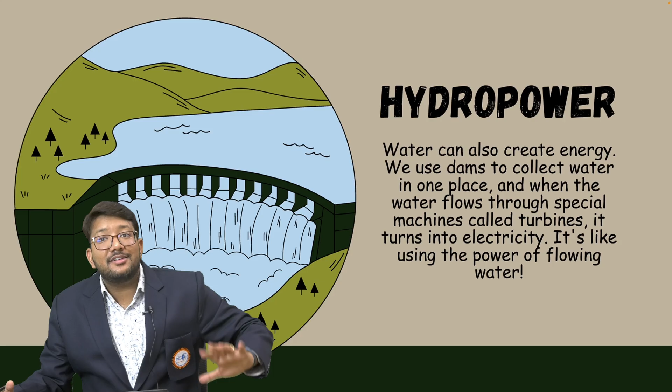As we know, water can also create energy. We use dams to collect water in one place, and when the water flows through special machines called turbines, it turns into electricity. It's like using the power of flowing water. So we can say that hydropower energy is the natural flow of water we are tapping, and with the help of technology we are converting that kinetic energy of water into electricity.

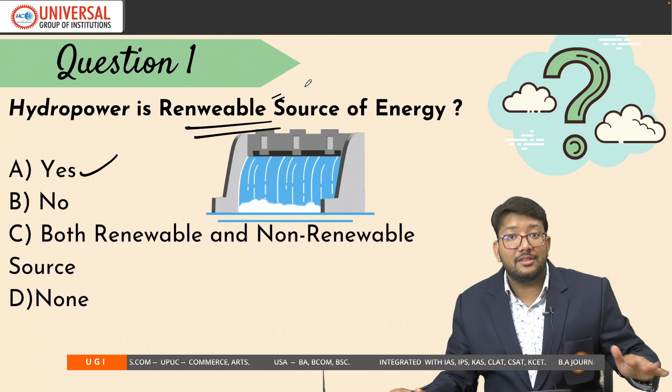If somebody asks you whether hydropower is a renewable source of energy, yes, it is. Renewable source of energy means it can be renewed again. A general misconception is that renewable source means zero carbon dioxide emission. No, it's not that. If carbon dioxide emission were the definition of renewable source of energy, then biomass wouldn't be coming under renewable source, because in biomass energy carbon dioxide gets released. So I want to clear this misconception: renewable source means the source is readily available to renew. For example, water is available, solar is available, wind is available, biomass plants are available, and geothermal, the earth's energy beneath the earth's crust, is available. So all these will be called renewable sources of energy. Non-renewable means fossil fuels, coal, petrol, nuclear, all come under non-renewable, because these are not readily available. They need a lot of time, billions of years, to create.

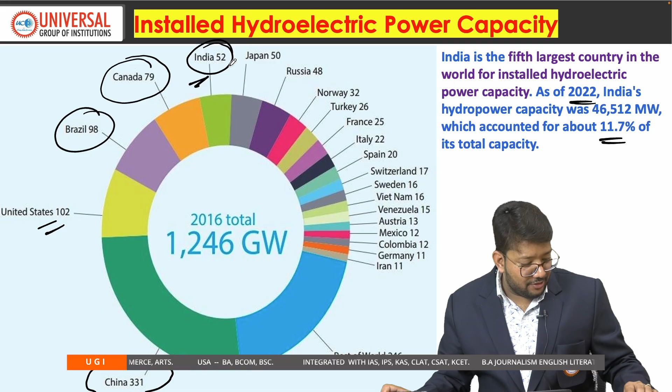Now let's talk about the reservoir. This particular artificial water storage is called a reservoir. Reservoirs can be natural also and artificial also. It was asked in an examination whether a reservoir is always artificial - no, it can be natural also, storing water for uses in homes, business, and other places. Reservoirs are usually formed by constructing dams across rivers. They can also be formed from natural lakes where the outlet has been dammed to control the water level. This word reservoir comes from the French word meaning storage, and it was first used in 1690. Now let's talk about the types of reservoir.

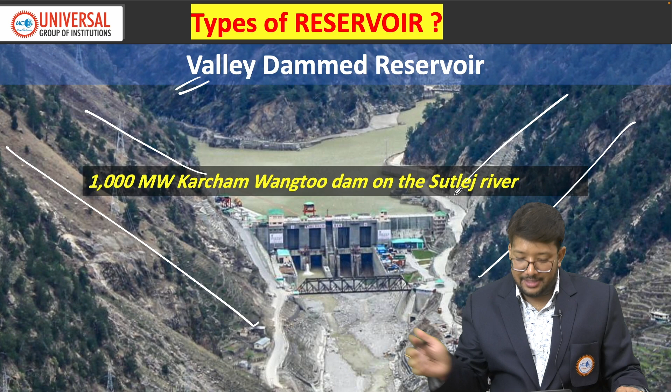First is the valley dammed reservoir. Valley dam, what is a valley? Valley is the area, the place between two mountains. As you can see, this is the mountain, and this particular area is called valley. So if a river is flowing in a valley, and we block that river by constructing a dam, that is called a valley dam, and the reservoir is called a valley dammed reservoir.

There is an example of a valley dammed reservoir in India also: the Karcham Wangtoo Dam on the Sutlej river, producing 1,000 megawatts of electricity. The second type of reservoir is the Bankside Reservoir.

An example of a bankside reservoir is the Thames Flood Defence Scheme in London. This particular reservoir does not have any capacity to store water, so it is on par with barrages.

What is the difference between barrages and dams? Dams have many uses - we can use dams for tourism, irrigation, agriculture, everything. But barrages have only two roles: first, to regulate the flow of water, and second, to change the direction of the river. That's the only use of a barrage.

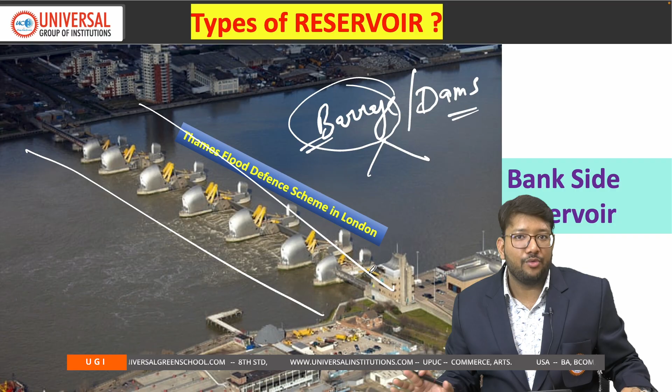One famous barrage is Harike barrage in Punjab, and its water is diverted to the Indira Gandhi Canal. The canal was earlier called Rajasthan Canal, and when Indira Gandhi ji was assassinated, in her honor we changed the name to Indira Gandhi Canal. Now, because of that canal, a lot of the western part of Rajasthan is getting water for irrigation as well as for drinking purposes. The project is still going on, and it is one of the most successful projects in India.

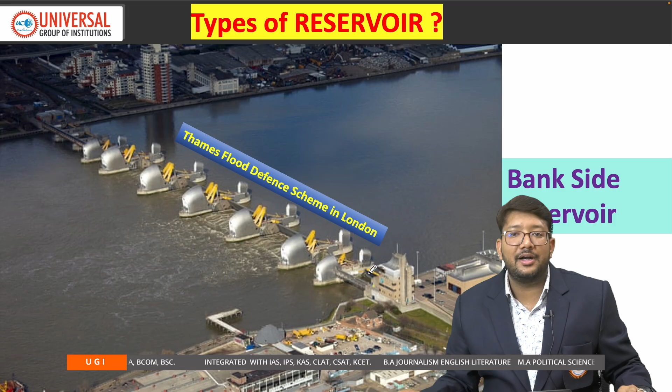Harike barrage has already been asked in examinations. This photo is of the Thames flood defense system, located on the Thames River in London.

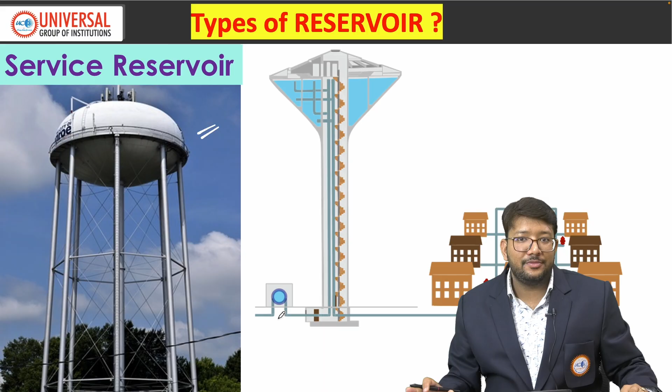The third type of reservoir is the service reservoir. You have all seen these tanks in your neighborhood. These reservoirs serve us for irrigation, drinking, household activities, and industries. So these are the types of reservoirs. I hope you got the point.

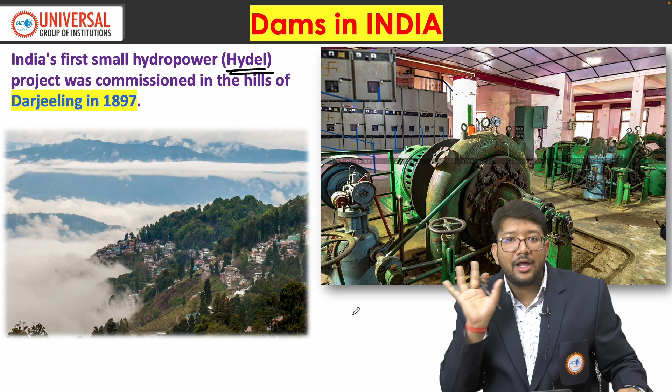In India, the first small hydropower project was commissioned in the hills of Darjeeling, West Bengal, in 1897. Remember, the difference between hydel and hydropower project is simple: hydel refers to small hydropower projects, while hydropower or hydroelectric projects are the big ones. That's the only difference.

This small hydropower station is called Sidrapong Hydroelectric Power Station, the oldest power station in India - again, an examination point of view question. More importantly, it was granted cultural heritage site status by the central government of India in 1997, located on the foothills, 12 kilometers from Darjeeling. It was commissioned on 10th November 1897 by Mr. C.C. Stevens, acting Lieutenant Governor of Bengal at that time.

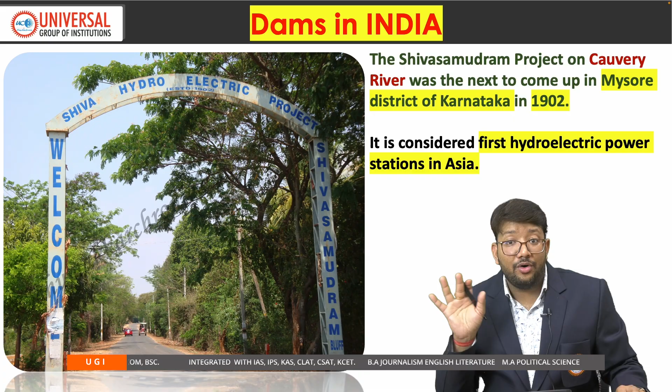The second project that came after Sidrapong was the Shivasamudram project on the Cauvery river. It came up in Mysore district of Karnataka in 1902, and it is considered the first hydroelectric power station in Asia, not even just India. The idea of tapping the water from the falls in this area came to Alain Chartier Joly de Lotbiniere in 1898, who wanted this project to supply power for machinery at Kolar Goldfields.

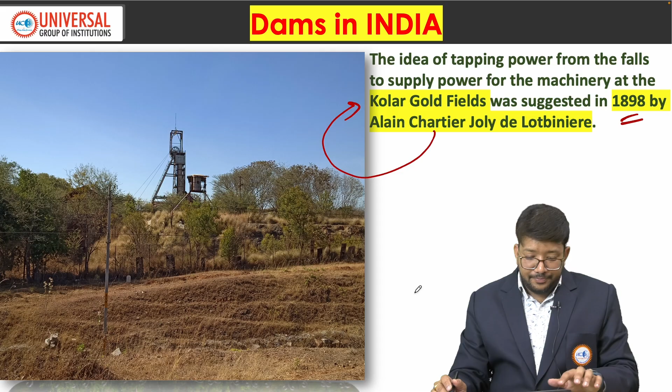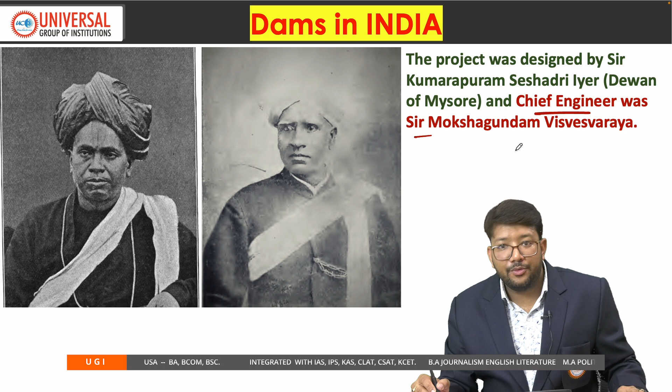Who is the architect of this project? It was designed by Sir Kumarapuram Seshadri Iyer, who was the Dewan of Mysore at that time. Also responsible was the chief engineer, the very famous Sir Mokshagundam Visvesvaraya. These two persons are responsible for the designing and construction. We all know Sir Visvesvaraya - he was knighted KCIE.

KCIE means Knight Commander of the Order of Indian Empire, and he was later awarded India's highest civilian honor, the Bharat Ratna, in 1955. Also, he is celebrated annually on Engineers Day, 15 September, in India.

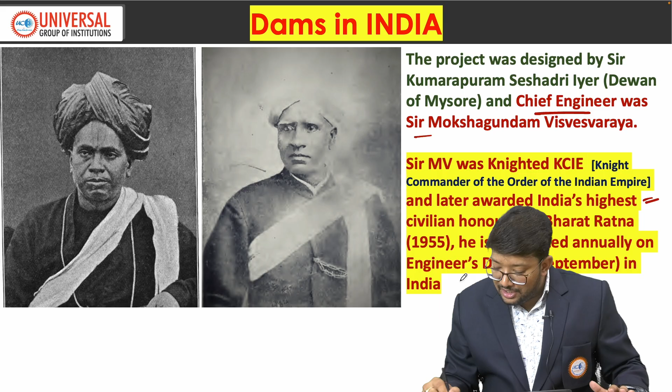Now let's talk about types of hydropower plants. There are 3 types: first is conventional, or we can say reservoir hydropower; second is run-of-river hydropower; third is pumped storage hydropower.

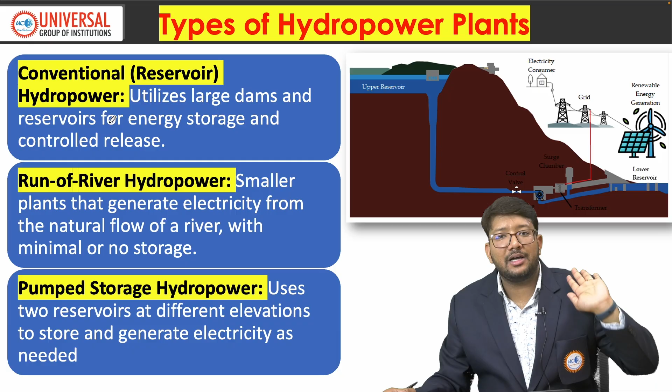Conventional hydropower is simple: we create a dam and then open the gates, so turbines move. That is conventional. Second is run-of-river, which was used earlier but is not that popular now.

These are smaller plants that generate electricity from the natural flow of a river. It is generally used in the Himalayan region, because in that region we cannot have a big reservoir, so we simply use the fast natural flow of the river. So there is minimal, or no storage at all.

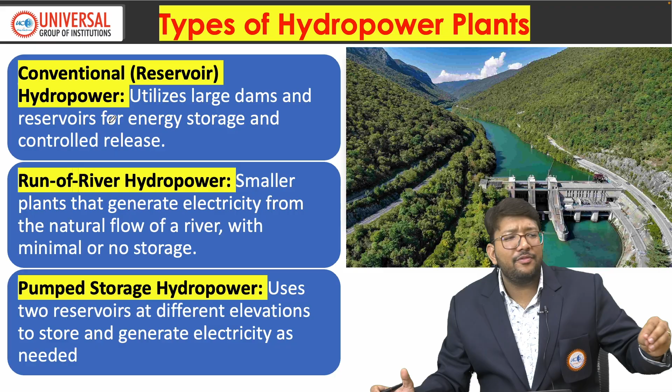The third one is pumped storage hydropower. In this plant, we use 2 reservoirs at different elevations to store and generate electricity as needed. This is the upper reservoir. When the water goes down, turbines move and electricity is generated. Now that water is stored in the lower reservoir.

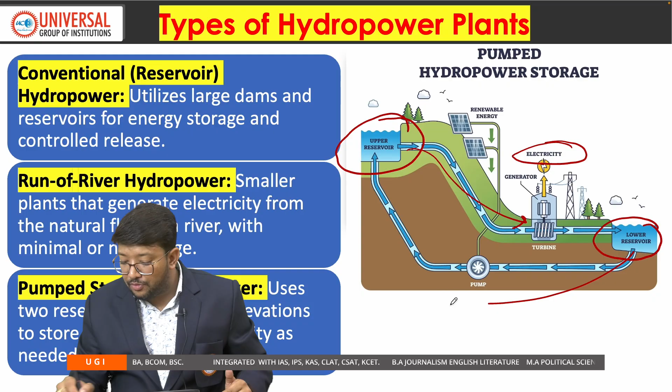Now what do we do? We use the same electricity generated by the upper reservoir's water, or we generally use solar power, to pump that water from the lower reservoir back to the upper reservoir. That is called pumped storage hydropower. That we have to remember.

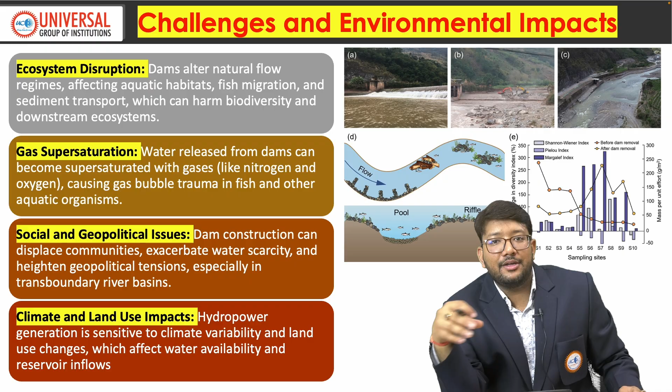Now, what are the challenges and environmental impacts of these big hydroelectric power projects? The first one is ecosystem disruption, because dams alter the natural flow. If they alter the natural flow, it will affect the downstream ecosystem, like fish migration and sediment transportation. Second is gas supersaturation.

We all know saturation, but gas supersaturation means when we release water from the dam, it can become supersaturated with gases like nitrogen, oxygen and methane. It can cause gas bubble trauma in fish and other aquatic organisms. Downstream, fish are simply roaming, but suddenly when this water reaches those aquatic animals, they get a shock, they get trauma - that is called gas supersaturation, because when we open the gate, a lot of gas is immediately released downstream.

The third one is social and geopolitical issues, because when a dam is constructed, it displaces communities, creates water scarcity in the area, and heightens geopolitical tensions.

A recent example is that the world's largest dam is the Three Gorges Dam, built by China. Recently, China has announced plans to construct the biggest dam in the world on the Brahmaputra river. Now that's a problem, because if the natural flow of the Brahmaputra is stopped, Indian downstream areas like Assam and Arunachal Pradesh will be impacted.

Although it's been countered that we don't need that much water, the reality is that Brahmaputra water is needed. The Brahmaputra is also called Yarlung Tsangpo in Tibet. It is called Siang in India when it enters through Arunachal Pradesh. That Siang is accompanied by the Dibang and Lohit rivers, and then it is called Brahmaputra. When it enters Bangladesh, it is called Jamuna.

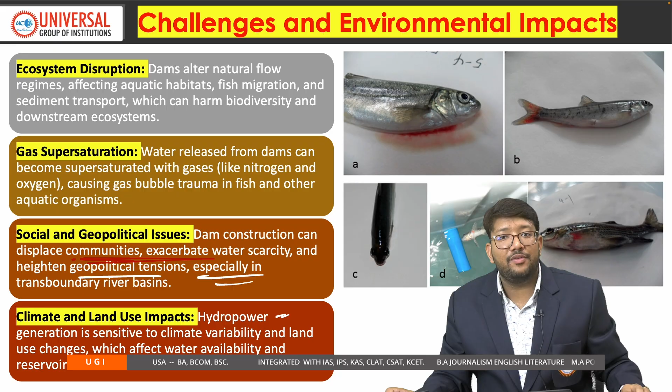When we are submerging a big area of land, fertile land will also go, along with many historical monuments. We may not feel it, but when somebody's home is getting submerged, a lot of memories and emotional attachment are submerging, not only the houses. A bad thing about Indian rehabilitation is that it's not successful, because in the past, when rehabilitation took place, people did not get the compensation as promised, or the standard of living they were expecting. That thing we have to keep in mind.

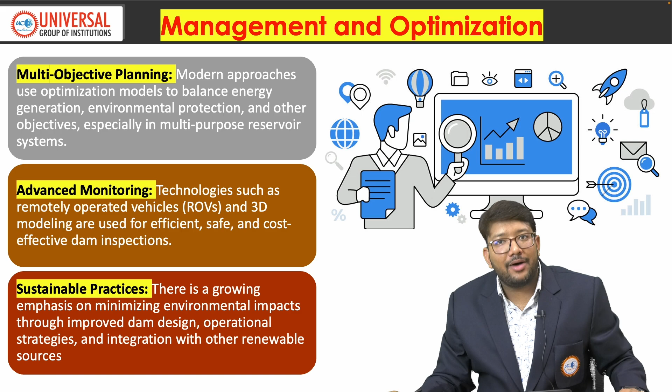Now, what are the solutions? There are three: multi-objective planning, advanced monitoring, and sustainable practices. Focusing on multi-objective planning, the first point is that electricity generation has to be efficient.

Also, we have to ensure water supply for irrigation and drinking, because surprisingly, a dam can create water scarcity, which is like an irony. How can a dam create water scarcity? It should be giving more water to nearby areas, but the issue is that we don't have proper water supply channels for irrigation and drinking purposes. That has to be taken care of.

Third is flood control. The monsoon is going on right now, so whenever the monsoon comes, the rainfall is more and our cities are not able to handle that. Again, the dam gates are opened when they were supposed to be closed to control floods, but it happens the opposite way. Now the dam's water is also coming into the cities along with the rainfall water, so two things hit the cities at once. That is also an issue that has to be taken care of.

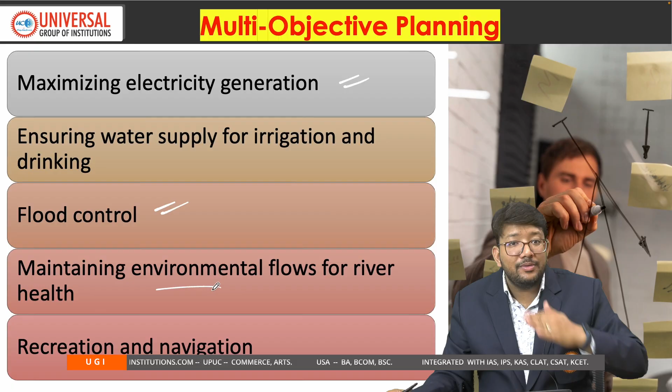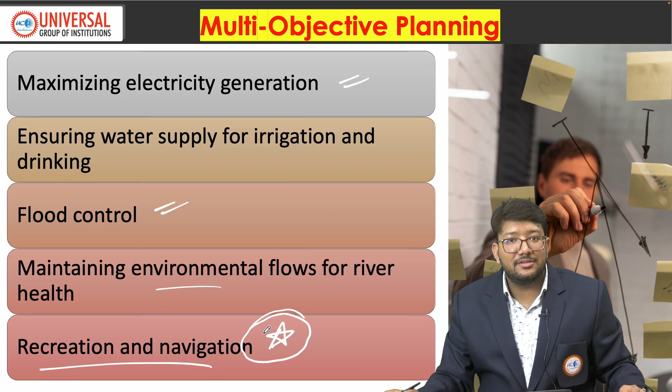Fourth is environmental flows for river health, like river flow has to be maintained regularly. The fifth is recreation and navigation, which helps tourism as well as river health, because when we clean a river, the aquatic life comes back into its lifeline. The same way, the Sabarmati riverfront in Gujarat is a very good stretch, where both things go together - people enjoy leisure activities and the river gets saved. The government is planning the same thing for the Yamuna river in Delhi. Let's see how it goes.

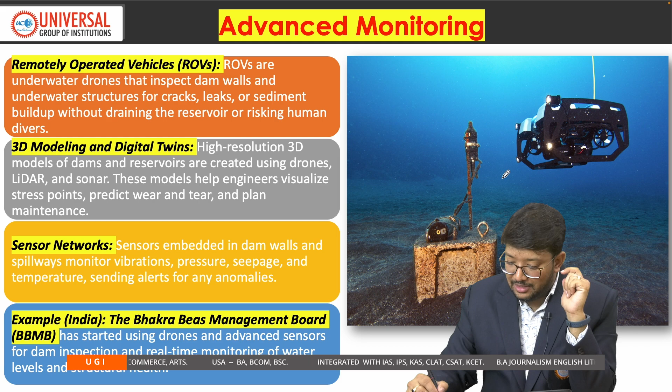Second is advanced monitoring. This is very important - we are using or can use remotely operated vehicles, ROVs, as shown in the diagram. These ROVs are underwater drones used to inspect dam walls and underwater structures for any cracks, leaks, or sediment buildup, without draining the reservoir. Otherwise we would have to drain the reservoir and inspect manually, which takes a lot of time and risks human divers, because many times divers get choked and die at depth due to methane production.

Second is 3D modeling and digital twins. This means high resolution 3D models of dams and reservoirs are created using drones, LiDAR, and sonar - for your homework, research on LiDAR and sonar technologies. These technologies and models can help engineers visualize stress points, predict wear and tear of the dam, and plan maintenance accordingly.

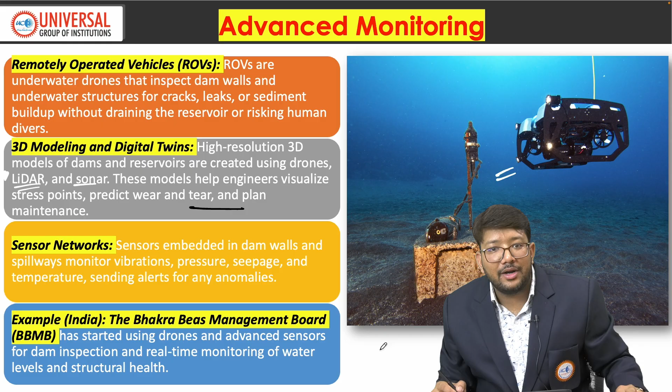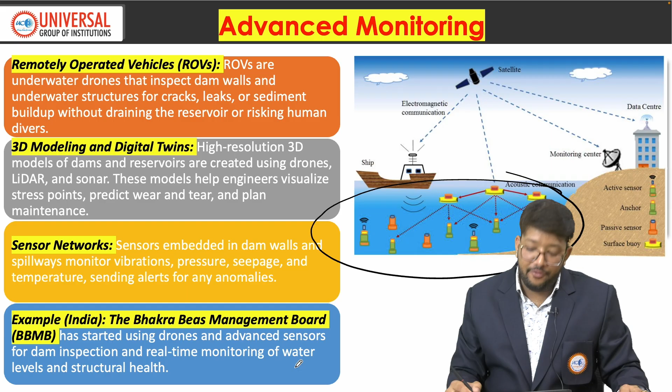Sensor networks are below the sea surface level and can be embedded in dam walls. Any vibration, spillway activity, pressure, seepage, or other anomalies can trigger alerts. A recent example of such technology being used in our system is the Bhakra Beas Management Board, which started using drones and advanced sensors for dam inspection and real-time monitoring of water levels and structural health.

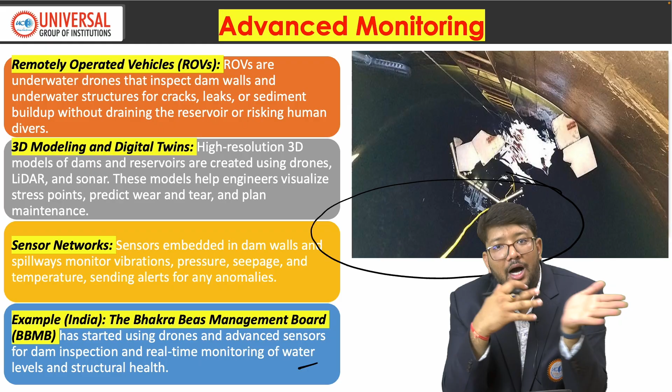I hope you get the idea of hydroelectric power projects in India - how they started and how they are going. In the next video we will talk about the 5 biggest hydroelectric projects in India.